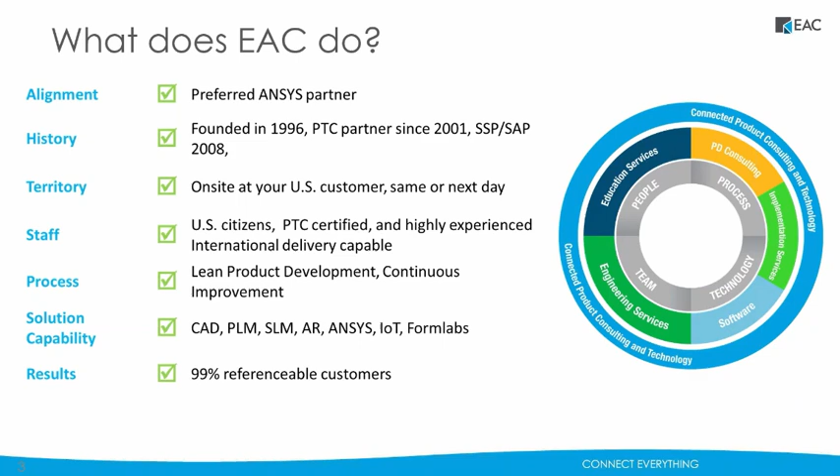Now, a little bit more about the ANSYS side of things. Most of you, when you hear the word ANSYS, you probably immediately think simulation, and that is exactly what ANSYS wants to hear. They put forth a great effort since they were founded in 1970 to do one thing and to be the best at it, and that's simulation. This is the only thing that they focus on, and it shows throughout their entire organization.

Their customer support system is completely unrivaled with over 450 PhDs on staff in over 70 locations in 40 countries. I've actually heard firsthand from some of our applications engineers at ANSYS that they like getting difficult problems to solve because they enjoy the challenge. If you have a problem, they would love to take on a challenge and try to help you find a solution.

Now, if you choose to focus on one thing, you'd better be really good at it. And ANSYS's reputation definitely backs them up here, as some of the data on this slide shows. They're 3 times larger than their nearest competitors, and 96 of the top 100 Fortune 500 industrial companies use ANSYS. I like to repeat that one just to let it sink in. 96 of the top 100 Fortune 500 companies are using ANSYS. That's an incredible statistic. And a big reason for this is that they're completely CAD agnostic and can truly work with anyone. It doesn't matter if you're using Creo, SolidWorks, Autodesk, or CATIA. Our simulation software can plug in easily with just about any CAD platform without any problems.

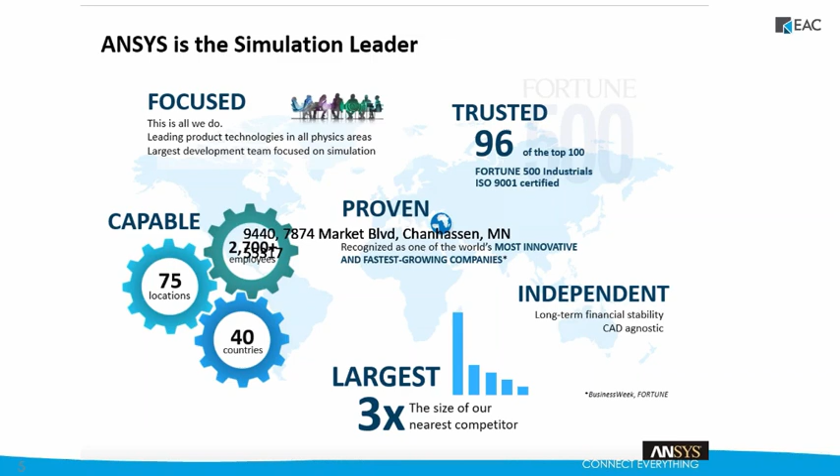Now, I've been using the word simulation a lot, and some of you might be thinking, okay, great. Simulation, that's all well and good, but what does this have to do with me if I don't know how I can use it? Well, I'm here to tell you that you can use simulation. I work with a lot of companies that use ANSYS all the way from their first design sketches all the way up to when they're cranking out production parts. You'd be amazed at what is possible by having a conversation with one of our applications engineers.

Some of the things listed here give an idea of how we can help. We work with autonomous vehicle companies all over the world to help them reduce their validation time from what would be 10,000 years down to just 2 to 3 years with some of the simulation capabilities that ANSYS can provide.

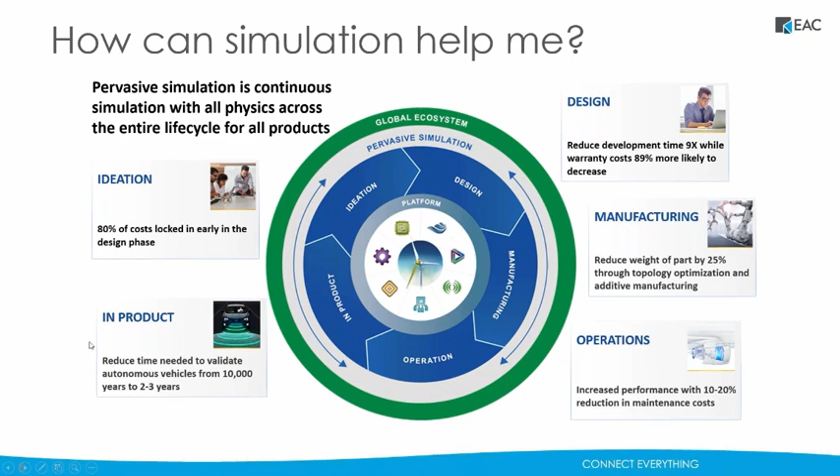Part of this is that our simulation results are now accepted by the FDA, FAA, and many ISO certifications that would normally require months to years of testing. So I hope I've given you some useful background information on EAC and ANSYS. With that, I'll turn it over to my colleague Rod Scholl to start talking about some of the specific products that ANSYS offers.

Thanks, Vinny. This slide shows basically the suite of products within the ANSYS name set. This is sort of an introduction to the tools in the EAC, but I like to present it because for me, this slide is more of a technical slide than a sales slide. Having done simulation for 20 years or so, on the service side, training, mentoring, and of course sales support and scoping.

One of the major benefits I've always seen in the ANSYS package is scalability. For any particular technical challenge, we've all had situations where we start with one tool, and as we progress, we eventually reach the limitation of that tool set. When that happens, it means you either have to not answer the question, or not answer it to the fidelity desired, or you have to switch and start over in a more advanced tool set.

Over the years, I've noticed that the cost of switching from a lower end tool to a higher end tool is expensive. Not only do you have to learn two different tool sets, but there is, of course, building the model over. So if we add up dollars over time...

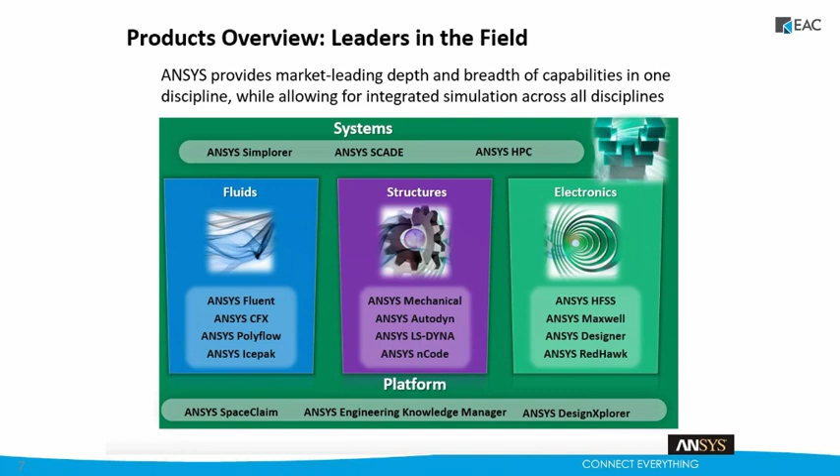Of course, it's also got the best capability, but that scalability is what I wanted to touch on.

This slide shows some naming levels within the ANSYS tool sets. Often the names change for these packages over time. I don't want to spend a lot of time on it, but this dovetails into the previous slide—you have a basic capability solution called Discovery Live. It's more of a designer's type tool, very cost effective. You can do very quick analyses with it, but fidelity is somewhat limited.

There's a middle end tool called Discovery AIM, which can do everything from fluid flow, mechanics, blow molding, etc., but not all the bells and whistles are implemented and turned on. Then you have these ANSYS flagship tools. Again, this slide just shows that you can start in one tool and expand through the tool set as required, and maybe clears up some naming differences.

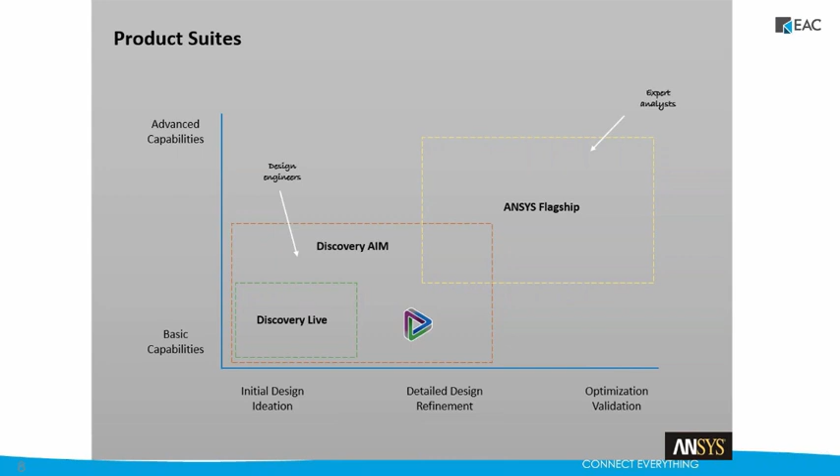The webinar today, we didn't want to focus purely on ANSYS. We want to essentially have a technical conversation about modeling fatigue. So although ANSYS is my tool of choice, I think what we're presenting today will be useful to anyone doing fatigue analysis in any software package.

So with that said, often when we're evaluating something in FEA, the generic question comes back from design or marketing of: is the product strong enough? That generic engineering term, strong enough, doesn't really classify the problem. Often people will then compare FEA results to yield strength. I think it's something we all did back in school, to just use yield strength as a universal criteria for evaluating a design.

But if you've done much simulation or have much experience on the subject, you soon find that there's always a little bit of material yielding.

If you tighten down a nut, you get some yielding at the interface, local yielding. And so the yielding isn't the issue. Really, what we're worried about is large scale yielding. And so the problem is never as simple, and that's even on the strength side. But then what we find is that many of our products actually don't fail in strength.

In fact, I'd say the majority of them actually fail in a fatigue type situation. Sometimes things are under designed where we would buckle or shear, or the loads experienced are higher than anticipated. But oftentimes things fail through repeated loading, time in the field. You get a crack which initiates and then propagates.

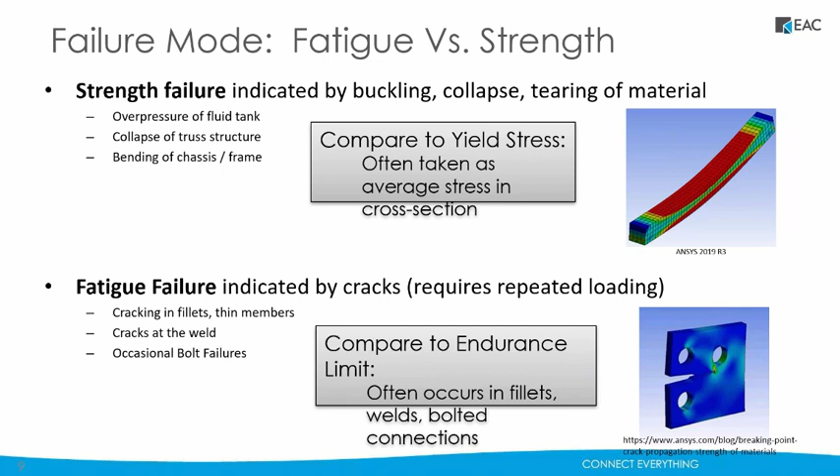Obviously, you could do a fatigue webinar that would take a week long, 8 hours a day, and still not exhaust the subject. People spend careers specializing in this, so we can't cover it all in 45 minutes, but we want to introduce some of the major topics.

Just driving home again the different types of failure modes. The picture's worth 1,000 words, I think, and so I kind of want to pass through these. For the strength failures here on the right, you have your buckling type failures, you have burst failures and components, and then you might have a full-on failure, such as shear.

Or crushing or tensile failure. Now, on the left-hand side, most fastener failures are usually fatigue-induced, and cracking in small fillet radiuses also are generally a fatigue-induced phenomena. And finally, most welds also fail due to fatigue cracking.

Usually once we start thinking about fatigue, it doesn't take long before we realize that most fatigue occurs at a joint. Either it's going to occur at a fastener or it's going to occur at a weld. Once in a while it occurs at a fillet radius, and so we always need to check that. But the problem becomes difficult quite quickly because fasteners and welds are something that are actually pretty complicated.

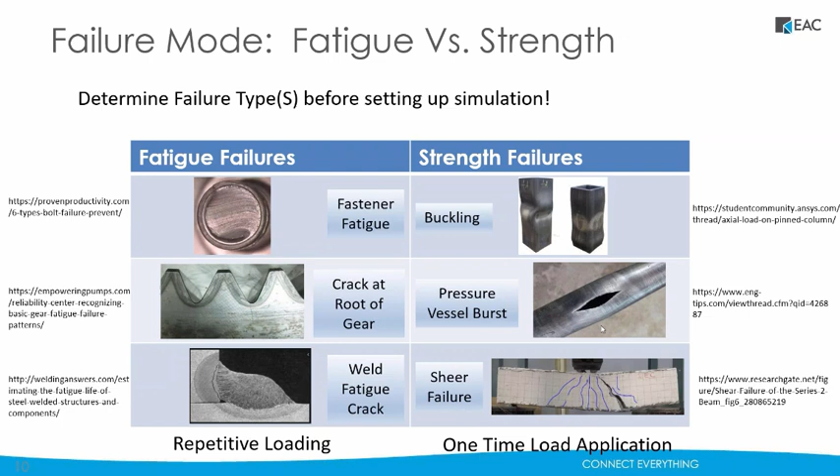Of course, fatigue is important to capture. There's tons of historical scenarios where fatigue wasn't considered, and current estimates now put it at over 600 billion a year in industry losses due to fatigue type failures.

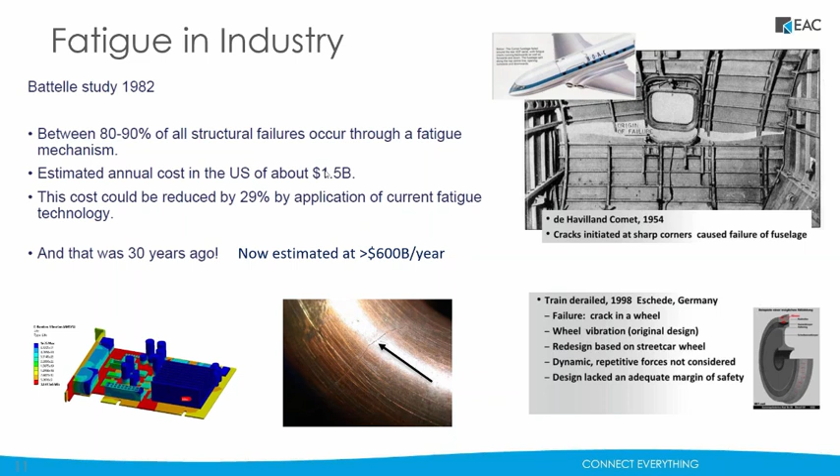And I wanted to mention fatigue forensics. So you might be in a situation where you're not sure how much things are failing in your industry or on your products due to strength or fatigue. Or maybe you're sure but haven't been able to generate an audience that has the same interest in predicting fatigue in your product set. Sometimes one has to sell the concept of simulation and its cost effectiveness in improving products and in the end driving revenue. Fatigue forensics is something you can do to do that.

Take a failed product, put it in an SEM, and actually show, especially if it's steel, you should be able to see the beach marks and fracture, crack growth, and find striations maybe down to the micro level, and then finally fast fracture at the end. And so sometimes a picture's worth 1,000 words. You can for $100 get an SEM image of a failed part, and put a picture to the actual mechanism. And that's a good precursor to say, okay, now that we know the mechanism, let's start simulating to predict it so it doesn't affect us adversely.

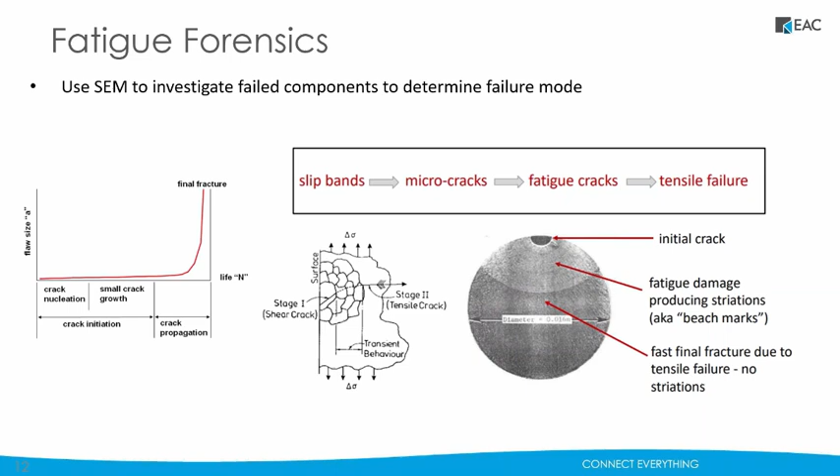For fatigue loading, obviously it's a repeated loading. We're thinking sometimes about fully reversed load, where it's going to go to a positive value to a negative value and resonate back or alternate back and forth. Oftentimes that's from vibration and resonance. Other times you might have a non-constant amplitude, such as, you know, you're mounted on an off-road vehicle or an aircraft or something with a non-constant signal. So there is some load definition that needs to be accomplished so that we can cycle count and add up either of these scenarios to assess the fatigue life due to them.

And so instead of talking about life in absolute years, oftentimes one refers to damage, which is a variable where you'll do a little bit of damage in this duty cycle. You can add those together via, say, Miner's rule. But obviously one needs to understand the loading environment and the changing loading environment in order to assess fatigue.

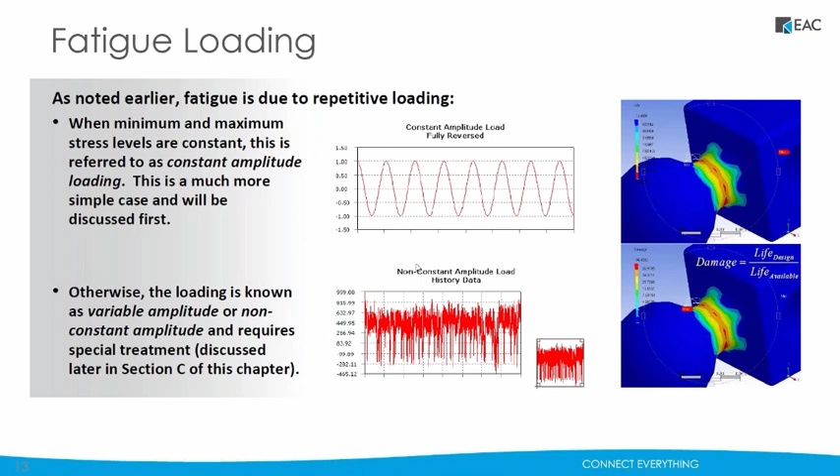Hopefully we've all seen SN curves before, so I don't want to spend a lot of time, but it's nice to see it on screen again. You get a certain number of cycles, you have a maximum, you can index for a given stress, and come up with a prediction of what the life would be for that stress.

The common mistake I see in industry is people using that SN curve without taking into account that those specimens generally used to generate such a curve were smooth, polished specimens at room temperature. Whereas what we have is usually an unpolished specimen, and there's also going to be variability in the field. If you have 1,000 products, sometimes 1 in 100 failures isn't acceptable.

So you can see I've got a list up here of surface finish, reliability, temperature, some size factors, environment. There's all sorts of other knockdowns that need to be applied to adjust this curve. So that's a cautionary statement: don't just pull a stress out and run to this curve, or you're going to be off dramatically in your predictions of the actual field life.

Because of the log nature of this scale, I'm going to throw out a rule of thumb that a 30% difference on stress is a 2x difference on fatigue. So if you double the stress, you can have dramatic changes in fatigue life. It's not a direct relationship. This isn't a very good rule of thumb because you're trying to extract a log scale relationship as a linear relationship, but it drives home the point that even a 15% difference in stress isn't trivial. That can dramatically change your product performance.

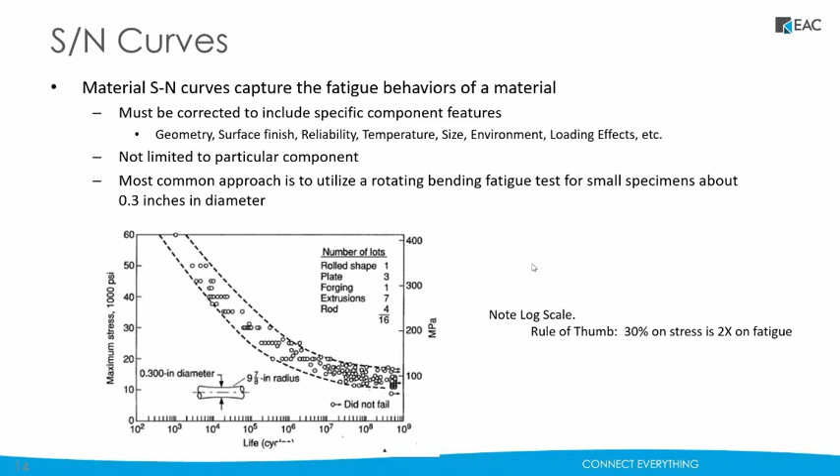It also requires a lot more fidelity in the FEA analysis approach, whereas in a strength calculation you just need to get ballpark because you're usually yielding through a cross-section. With fatigue, you're trying to predict highly accurately stresses at a small location—that would be a potential fatigue initiation site.

Endurance limit is a concept. If you look at those fatigue curves, as you follow the curve out, eventually some materials will flatten out, where there's a stress that if you stay below that point, you will have infinite fatigue life. You can load it all day long, and the product won't fail.

Other environments, like corrosive environments, or some aluminum and other metals, there is no safe amount of stress. One always has to do a fatigue calculation because you can add up 10 to the 7 cycles pretty quickly if you're resonating at 50 hertz, maybe in a matter of weeks.

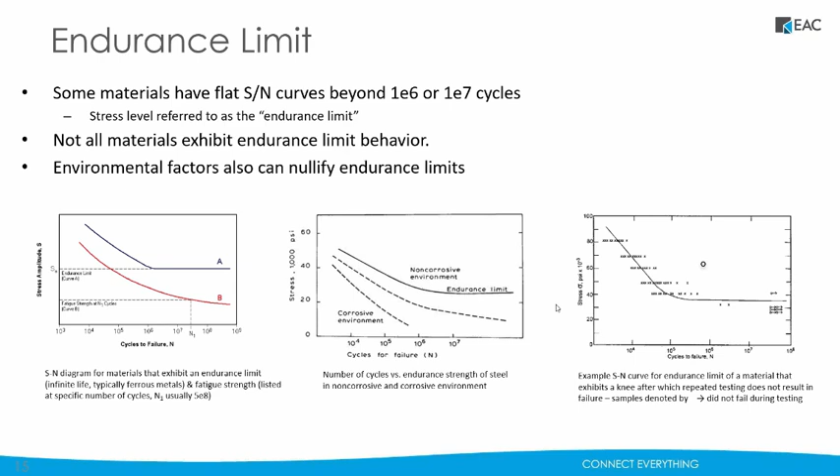So endurance limit isn't always something you can apply. Sometimes you can't just predict stresses and compare it to endurance limit. Sometimes you actually have to go the further step and predict fatigue life.

Just checking the time here to make sure I don't talk too long and rob us of seeing things, if we're doing good.

If we look closer at these SN curves, there are sort of 3 regions: where you have very high stresses, you can fail the product quite quickly. Then there's a middle region where it's fairly a straight line on a log scale, so you have a direct relationship between failure life and input stress. And then there's the endurance limit where it flattens out.

What I wanted to point out was that because of this straightness, here at the endurance limit, it turns out there's a pretty consistent relationship between the stress level of that endurance limit and the ultimate tensile strength of the material. I've seen a lot where people will compare it to yield stress and just say, well, we don't do fatigue evaluation, but we just compare it to yield, and we call that good enough for our products. That's always worked.

That's perhaps true for their particular product set. But really what makes more sense, if you're just going to do a back-of-the-envelope approach, is to compare it to ultimate tensile strength. That's what fatigue endurance limits are proportional to, not yield strength. If you harden a material, the yield strength changes dramatically, but the ultimate tensile strength doesn't. Similarly, you can harden a material and change the yield strength, but you're getting roughly the same fatigue performance out of that material. So switching over, at a minimum, to tensile strength rather than yield is maybe your first step towards a quick approach to fatigue evaluation.

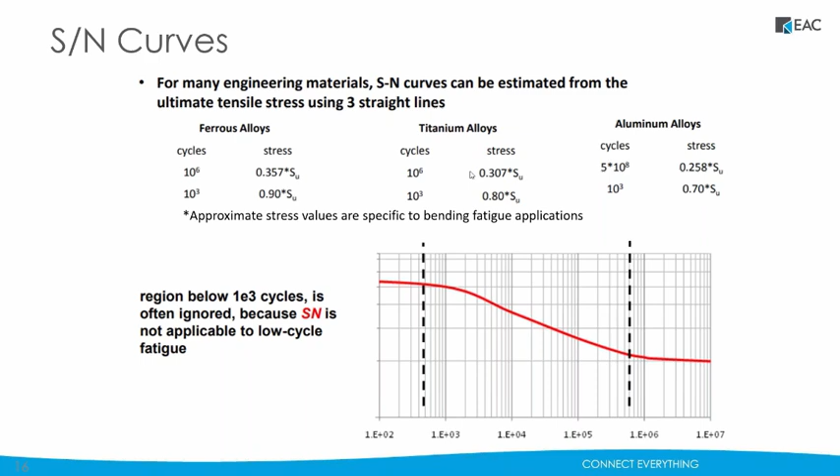I mentioned before that you can't necessarily start with an SN curve and index stress right away - you have to apply these knockdowns. It would take quite a bit of time to go through each of these, so we don't have that, but I wanted to put them on screen and talk about them briefly. For example, whether the specimen is machined, hot rolled, forged, corroded, or polished. There are different ways to index, and depending on this, you can index the tensile strength of that material, what your surface finish is like, and eventually come up with a correction factor.

So just as an example, if we take 120 KSI tensile strength and a machined specimen, you can see we have a surface factor around 0.7. So you've already lost like 25% of your allowable stress just taking into account the machining, since it's not a polished specimen. It's a non-trivial thing to include.

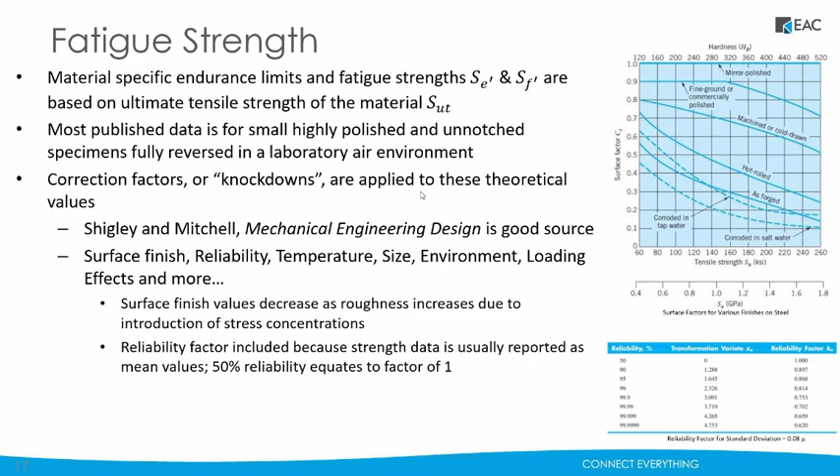And the reliability factor has the same effect - it drops things down by easily 20%. So by the time you add in your safety knockdowns, let's say your allowable stress on the specimen was 100 KSI - a big number - by the time you do the knockdowns, it's going to drop down to about 40 KSI. You're going to lose more than half of the allowable stress that you get off an SN curve.

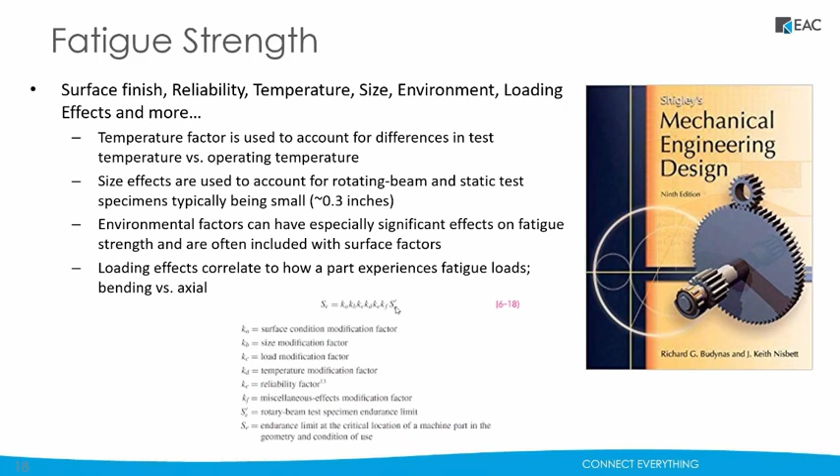A good place to start to understand all this and delve into it is Shigley's much celebrated book. It's a pretty clear listing of all the different knockdown factors and how to get started on each one of them.

We should talk about the Goodman diagram - I think it'd be remiss to not include that. We know that you can have a mean stress. If your mean stress is at ultimate tensile strength, meaning the background stress, you're going to fail without applying any vibration - that's just called a tensile test. So if you don't have any background stress but you have a large alternating stress, that will also fail.

Often we're in a situation where we need to know it's got a background stress of 20 KSI, but it has an alternating stress of 10 KSI. The Goodman diagram is what lets you take into account the mean stress of your product as well as the alternating stress. So a good fatigue analysis will analyze both - you'll analyze the as-installed, as-built stress, perhaps with bolt pretensioning or thermally induced stress, and then in a separate analysis come up with alternating stress, and combine those two together.

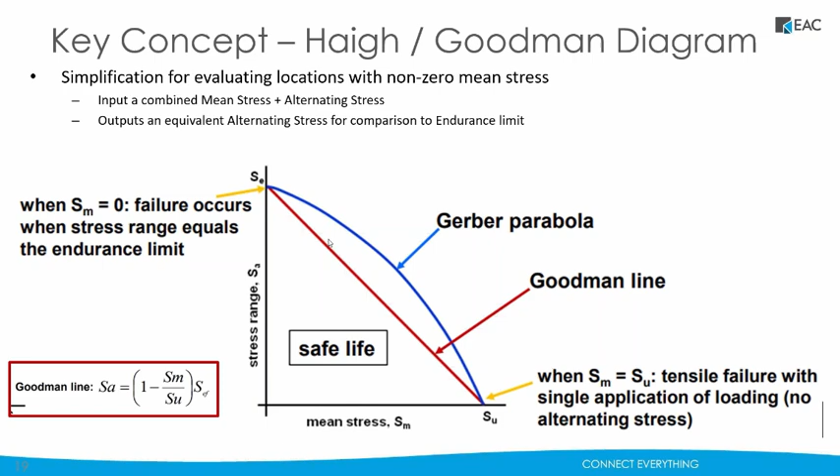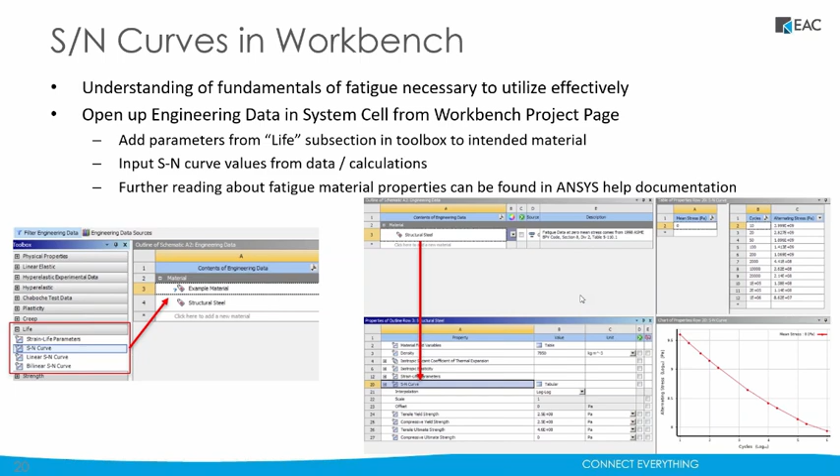Typically within the ANSYS tool set, there are SN curves that are built in - you can also add them yourself. This will save you from having to build a dramatic spreadsheet trying to do these calculations. That's a lot of labor for something which has already been automated in most tool sets. Within ANSYS, and also with augmentation with Granta materials, you'll find quite a bit of data is already in the suite. You just need to specify the material, and it will start predicting fatigue life for you, and it'll even walk you through some of the knockdown factors.

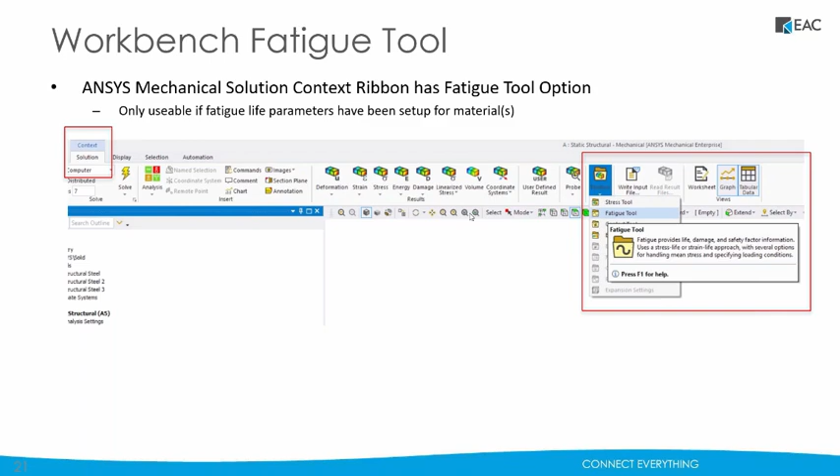ANSYS has a built-in fatigue tool, so this tool will predict damage and give you safety factors. You can do it with a stress life approach or a strain life approach - we probably won't get into that, but it's just different types of SN curves. You can specify different loading applications, whether it's what the mean stresses are, if it's a constant load, or if you have a load history.

So we've talked about a lot of different subjects already. I think it's always nice to have a tool set which is aware of those subjects, so that it can sort of walk you through it, or at least let you know you're on the right path.

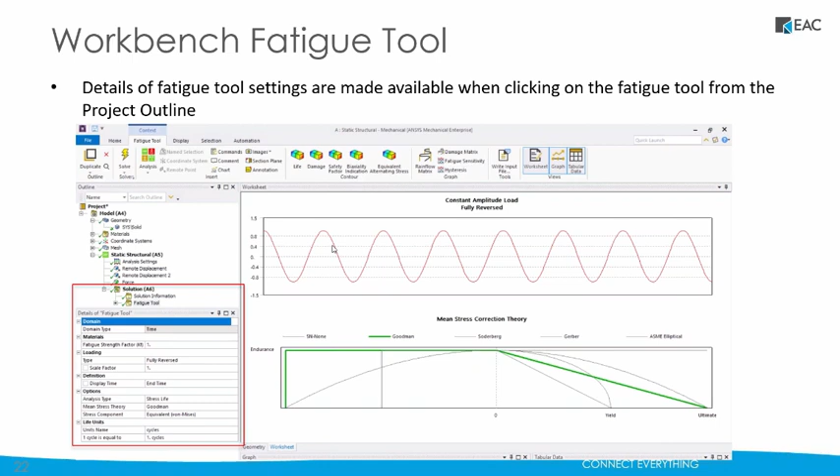Ultimately, what we're trying to do with simulation is communicate results to other stakeholders. A picture always helps with that. Pulling out XY plots doesn't always go over so well, but something about a colored plot communicates.

So sometimes the end product of all this analysis is that instead of producing a stress plot, one can produce a fatigue life plot. So in cycles, months, days, or years, you can say blue is where it's going to last forever, red is where it's going to break in a month. That often communicates to various stakeholders. Some industries use safety factor as well, that's an option.

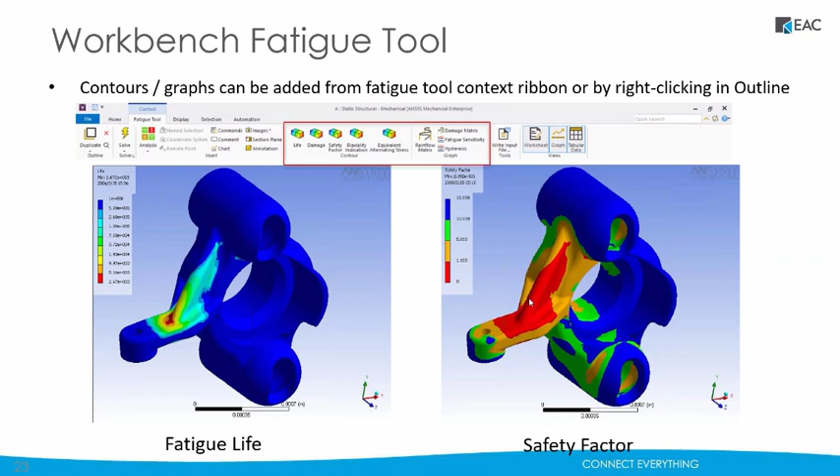There's easy fatigue, where we can just compare the UTS and a ratio. We can be a little more advanced and start predicting actual cycle life. By the time you get to strain life, or if you have very complicated loadings, multiple different environments, load histories, different products, welds, you reach maybe a need for a higher end tool. Pretty much the highest tool out there is nCode, which is in the ANSYS suite.

Obviously we can't get into everything there, but we wanted to point out that ANSYS scales to the most complex fatigue problem you're going to encounter. It's automated, there's a nice GUI, it's integrated into Workbench, and it can walk you through the steps, taking a lot of the labor out of doing these types of analysis.

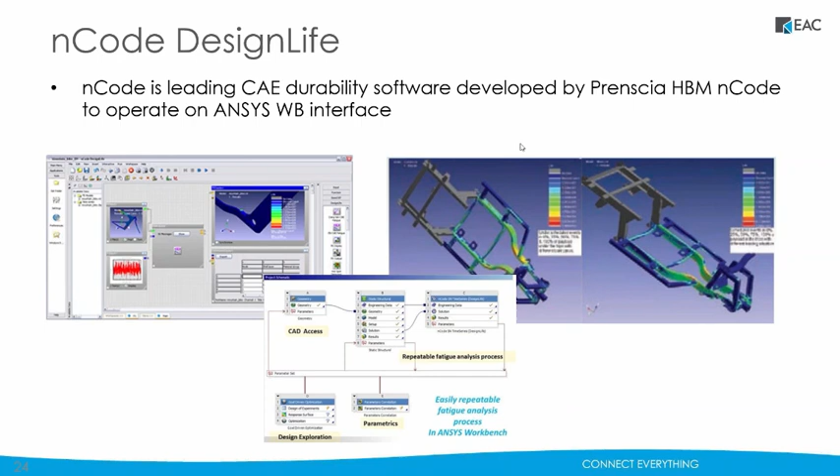If you do any amount of fatigue, especially if there's a load history or you have a lot of different materials, I would recommend nCode, it'll just save you time in the end, and save you money in the end.

To talk about specific tips for FEA, obviously we don't refine the mesh ad infinitum to resolve the stresses, they go up over time. Six elements per fillet is a good rule of thumb. If you need to go further than that or justify it, you can always do a mesh convergence study where you increase that density and show how much the stress is going to change.

I wanted to point out there's another method where you can avoid having to do that by using the PRERR statistic, you can read about that. That's a specific ANSYS term, but if you read into it, it may be available in other packages as well. This will let you predict how much energy has been captured, how much discretization, or how much difference between one element and the next you're getting, which will tell you whether or not you have an adequately refined mesh.

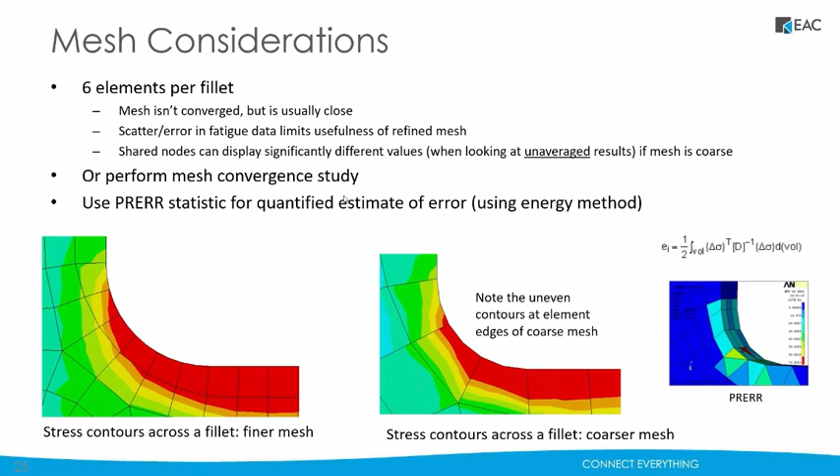Given that a small percent difference in fatigue stress, or in stress, has a big difference in fatigue life, we need to take this kind of thing into consideration when doing analyses of fatigue, as opposed to just stress analyses.

Of course, you get into scenarios with singularities, such as an applied point load or a boundary condition we're holding on a point, or where there's a sharp line in your model. Sometimes it's not feasible to go into your model and add a fillet at every location, it just takes too long. So in those cases, there's a few different workarounds I want to point out.

Of course, going and doing an analysis to kind of find rough high stress points and then going back and adding fillets to those locations is perhaps the most cost-effective approach.

Another thing you can do is to include material plasticity. So although it'll be unrealistic at the corner, it'll yield out and you'll have a region of yielded material. That's a common, easy way to address singularities. You can also change your boundary conditions, obviously trying to avoid point loads and point constraints is a big factor.

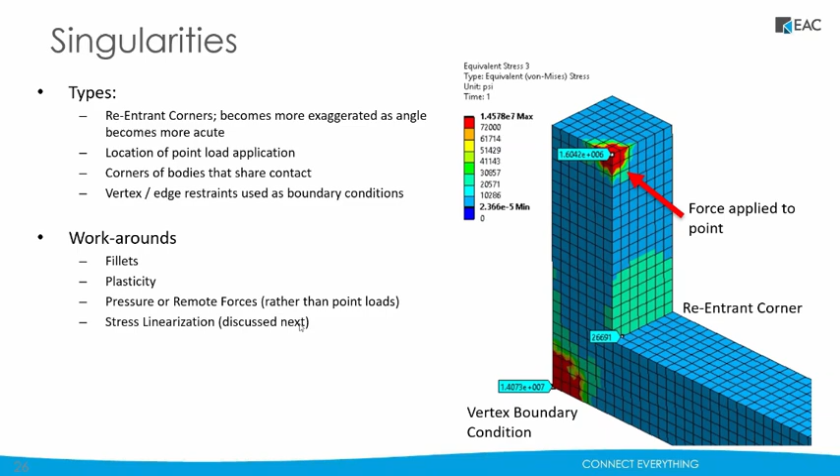But the last one, the most powerful tool, and one that I usually use at this point, is stress linearization. Stress linearization is a fancy sounding term for going through a particular point in your model and extrapolating the stresses along a line, curve fitting a linear line through that location.

This is used to predict what the stresses will be, say, at the toe of a weld or at a fillet that you didn't explicitly model. And then there's the hotspot method, which is a pretty refined approach for how to take your data points and how to extrapolate. So if you find yourself with a sharp corner or a weld, you're going to want to familiarize yourself with this hotspot method to evaluate those welds.

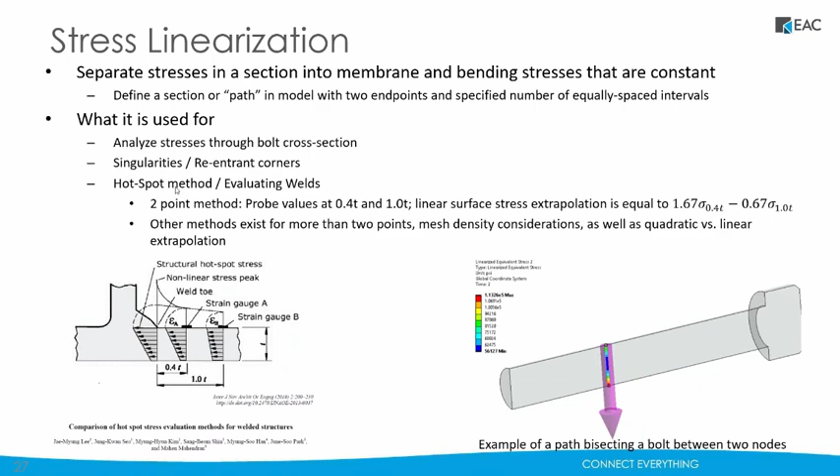In the last 15 years or so, there's been an explosion of people interested in predicting fatigue in welds and in small fillets, so you'll benefit from delving into this subject.

Well, we'd be a little remiss to not talk about bolt fatigue. I've got one slide in here because I don't want to leave it out, but obviously that's a huge subject. So if you find yourself in a situation where your bolts are what's failing first, that's probably a good design. That's the intent of bolted structures, is the bolts go first because those can be replaced.

To predict that behavior, you're going to want to rely upon a standard. It's pretty rare to have an FEA model of threaded fasteners where you're trying to predict stress in the root of a thread. So you're going to want to use a standard. I've thrown a few out there: ASME, I like BS7608, AISC, IIW, where you'll get an allowable mean stress for the bolt and alternating stress, where you don't have to know the stress in the fillet, just the average load going through the bolt.

And they've used component testing to determine how long a bolt lasts. Shigley also has an approach, which many industries just use. It lists the grade of the bolt and tells you what the allowable load basically is, or average stress, for that bolt. Shigley also shows a more involved approach. We can't get into all that here, but those are some keywords to get you started down that path.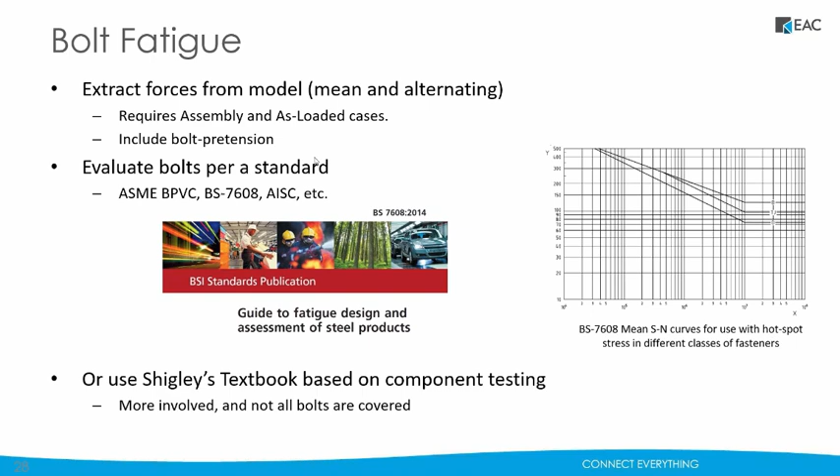For weld fatigue, again, that's a long conversation, but there are some standards: IIW, again BS7608, ASME, and AWS are all ones you might want to start with. They're growing together. They originally started out in different locations, but they're all kind of arriving at the same methodologies, including the hotspot method I mentioned.